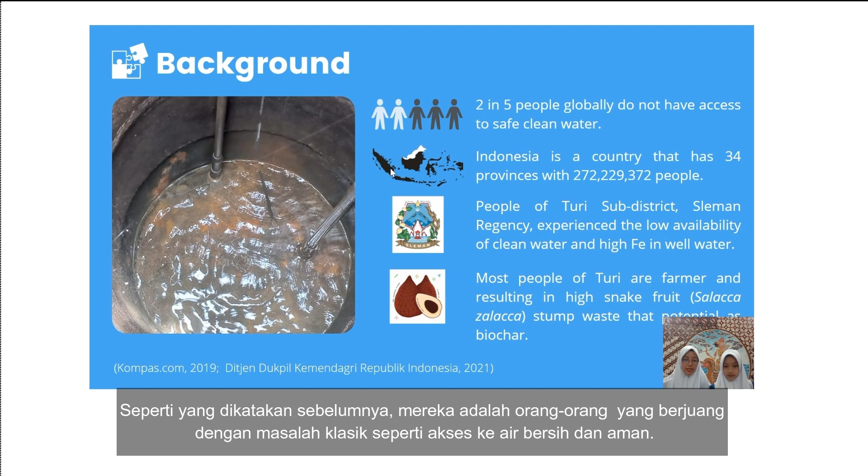As stated before, there are unlucky people in Indonesia who struggle with classic problems like access to safe and clean water. The rise of population leads to an increase in water demand. However, people in the Turi sub-district cannot all enjoy this luxurious clean water, specifically in Kenteng Wonokerto village. Most people there do not have access to PDAM for getting clean water, so they rely on the well's water. Ironically, this well's water is contaminated with iron, so further treatment is needed before consumption.

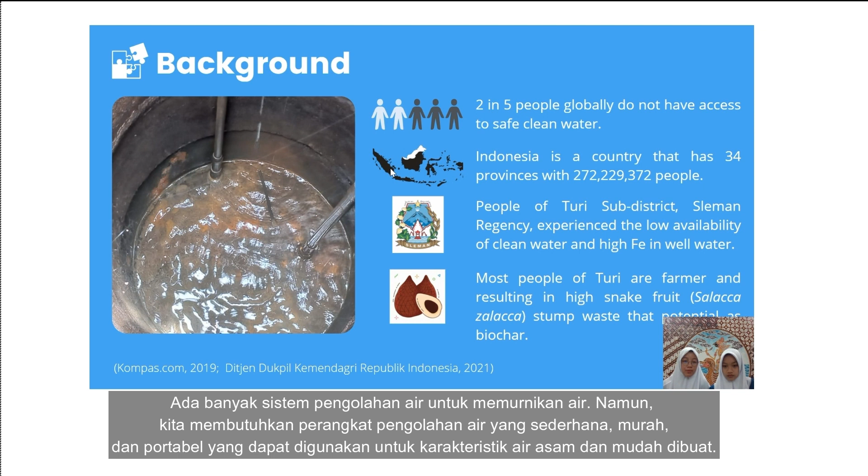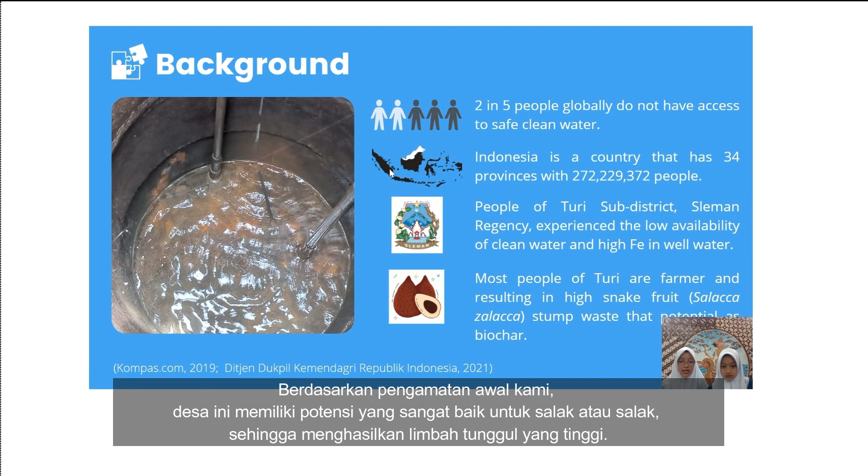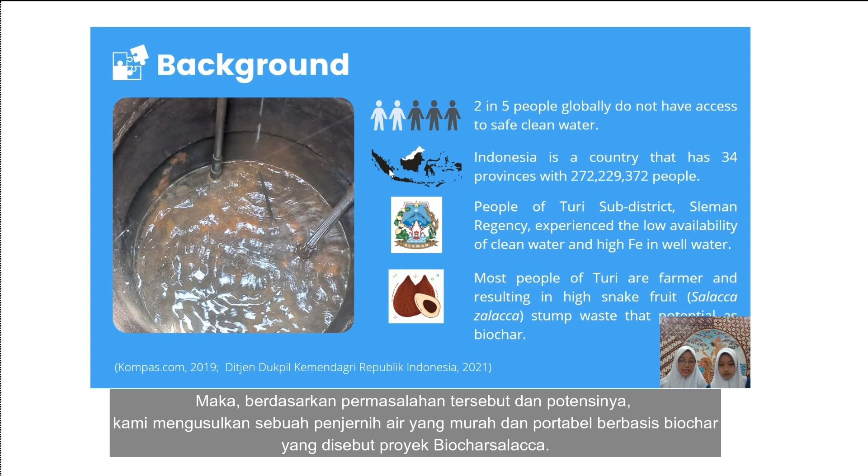There are a lot of water treatment systems for purified water. However, we need a simple, low-cost, and portable water treatment device that can be used for the characteristics of this water and is easy to build. Based on our preliminary observation, this village has excellent potential for snake fruit or salak, resulting in high stump waste. Meanwhile, this waste contains high carbon that can be transformed into biochar, and it can be used as water treatment material. So, based on this problem and its potential, we propose a low-cost and portable water purifier based on biochar called the Biocharsalacca project.

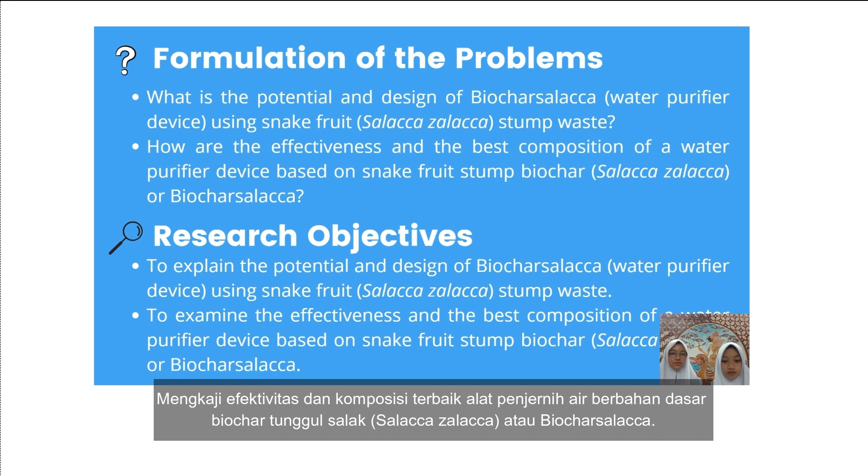With this background, we have two main research problems. First, what is the potential and design of the Biocharsalacca water purifier device using snake fruit stump waste? Second, how are the effectiveness and the best composition of a water purifier device based on snake fruit stump biochar, or Biocharsalacca? And our research objectives are to explain the potential and design of the Biocharsalacca water purifier device using snake fruit stump waste, and to examine the effectiveness and the best composition of a water purifier device based on snake fruit stump biochar, or Biocharsalacca.

This research was conducted in October 2021 to February 2022 at Kenteng Wonokerto Village, Turi Subdistrict, Sleman Regency, Daerah Istimewa Yogyakarta. This research used the quantitative approach with an experimental design, one group pre-test post-test design. Data was collected with observation, documentation, literature study, and experiment methods. Water quality data were analyzed in the iron or Fe parameter before and after treatment using Biocharsalacca.

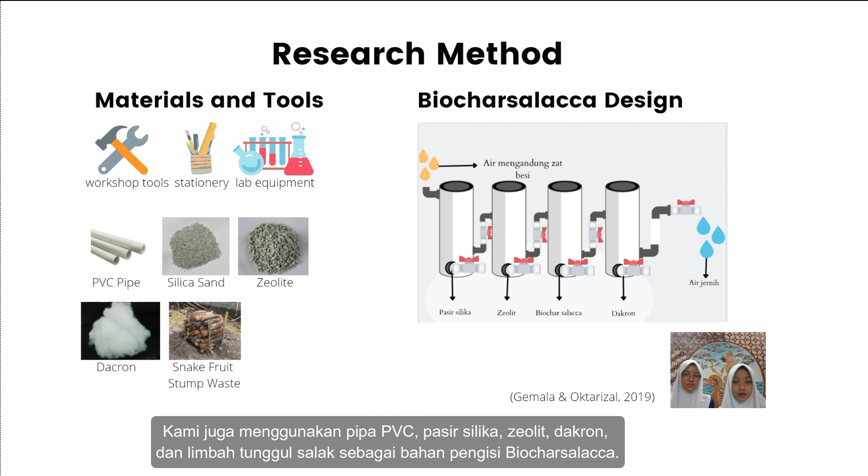This research used workshop tools, stationery and standard glass laboratory equipment. We also use PVC pipe, silica sand, zeolite, Dacron, and snake fruit stump waste as filler materials for Biocharsalacca. This is the Biocharsalacca design. Our research is divided into three phases. The first phase is biochar preparation and water sampling in people's wells. Next, we drafted and made Biocharsalacca filled with silica sand, zeolite, prepared biochar, and Dacron. Last, we tested the effectiveness of Biocharsalacca using water samples and analyzed its Fe concentration in BBTKLPP Yogyakarta.

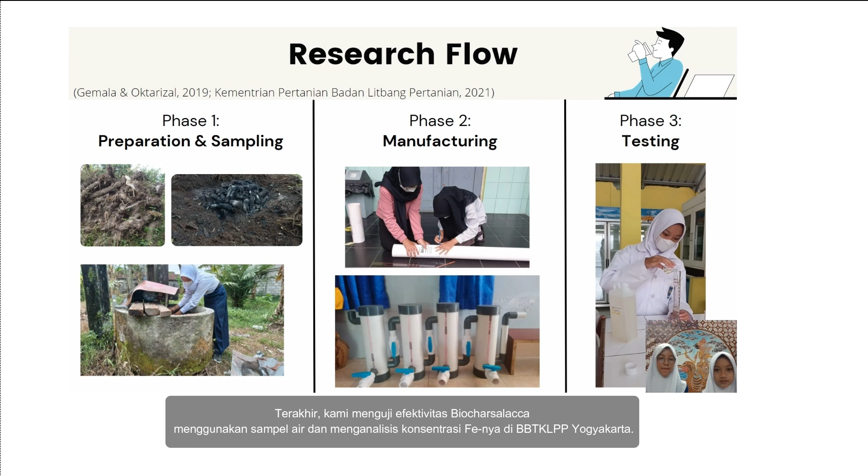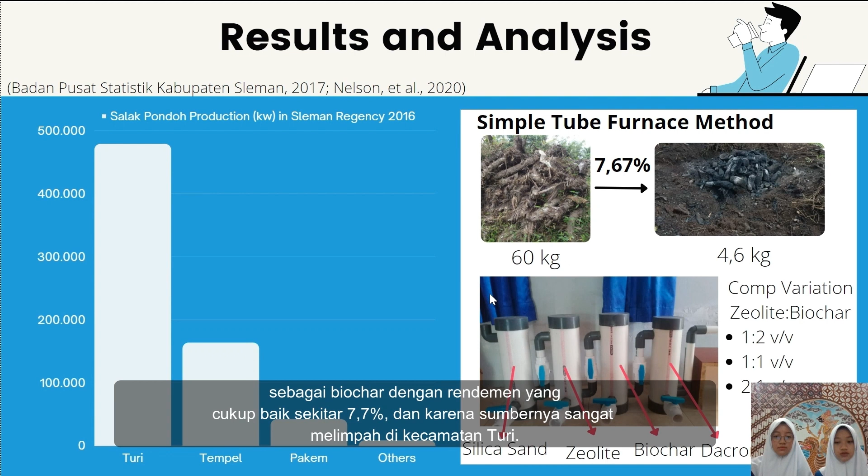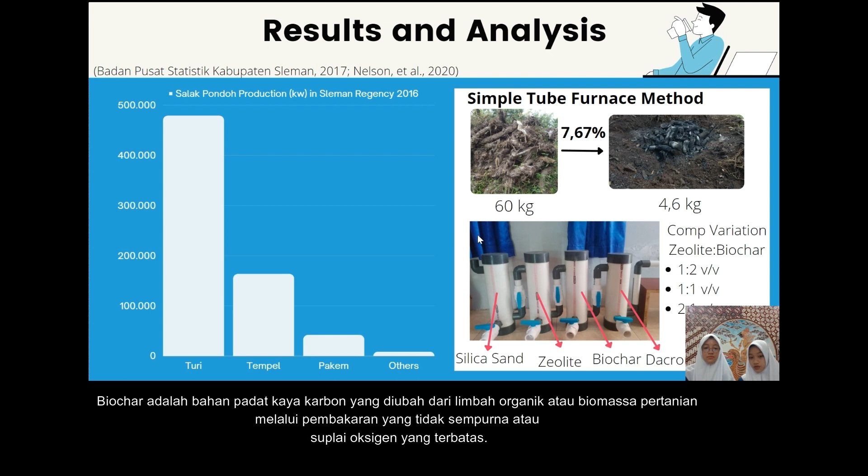We found that the snake fruit stump waste has excellent potential as biochar with a dry yield of around 7.7%, and because its source is highly abundant in the Turi sub-district. Moreover, this district produced over 450,000 quintals of snake fruit in 2016 and became the highest production in the Sleman Regency. Biochar is a carbon-rich solid material converted from organic waste or agricultural biomass through incomplete combustion or limited oxygen supply. In this research, biochar is made using a simple furnace method. The combustion process takes about 12 hours and is left for 7 days before being used.

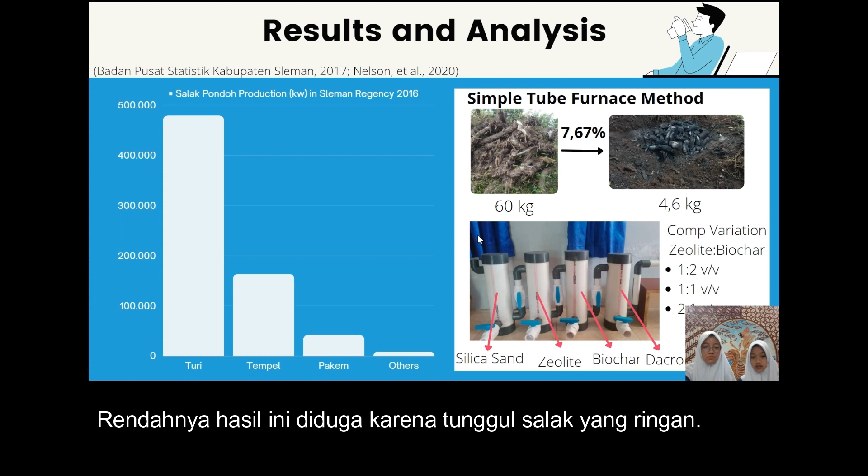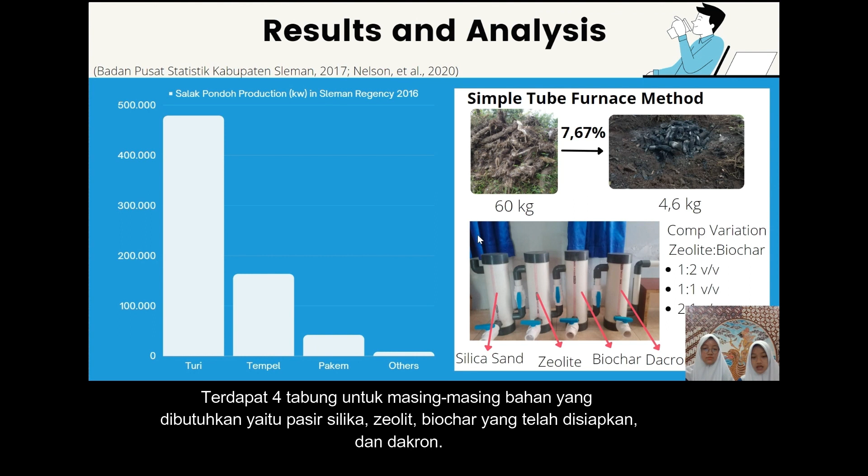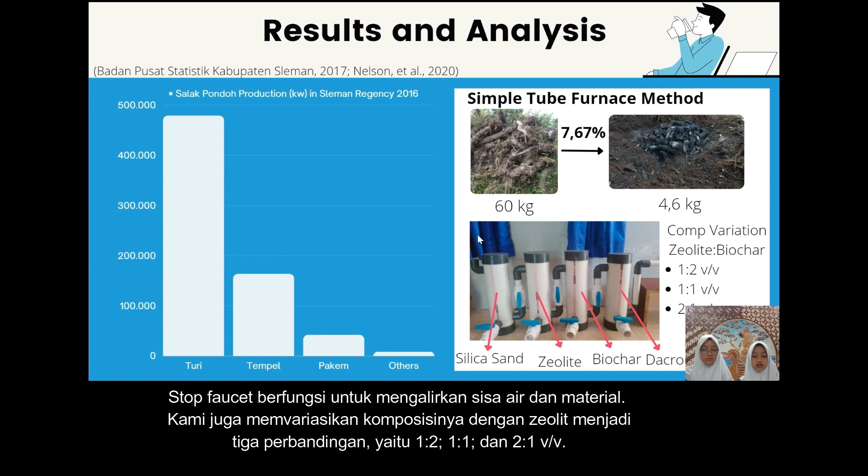From 60 kg of stem waste, 4.6 kg of biochar was obtained. This was predicted due to the snake fruit stem's light nature. If we were using the density of the snake fruit stem, then we expected a higher result. Next, we prepared biochar and other fillers and filled in the Biocharsalacca. There are 4 tubes for each required material, namely silica sand, zeolite, prepared biochar, and Dacron, and a stop faucet to drain the remaining water and materials. We also varied its composition with zeolite into 3 comparisons, namely 1:2, 1:1, and 2:1 v/v.

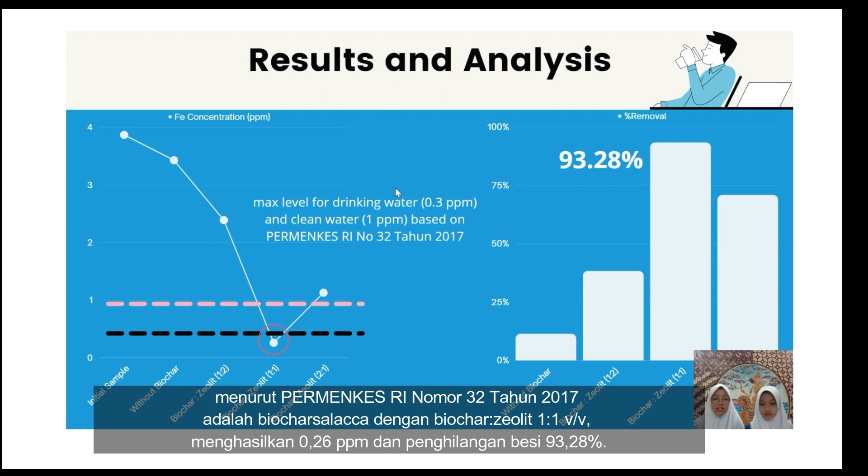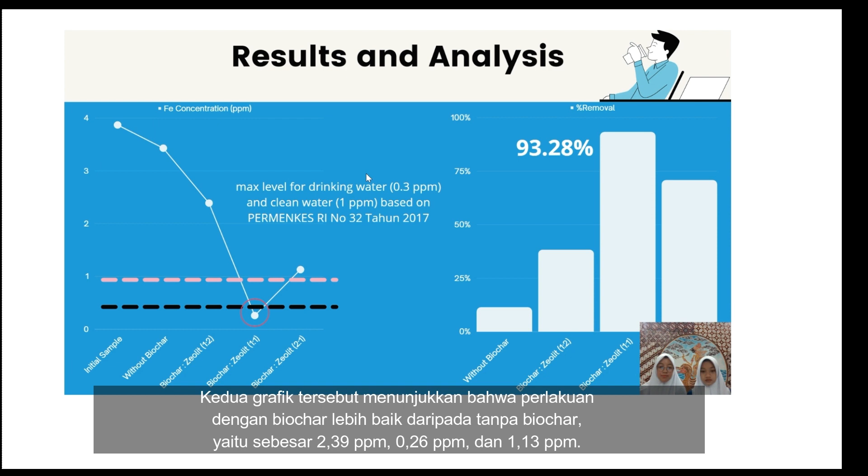We also found that the only composition that passed the drinking and clean water standard according to the Permenkes RI number 32 year 2017 is Biocharsalacca with biochar to zeolite 1:1 v/v, which resulted in 0.26 ppm and 93.28% removal of iron. This chart showed that the treatment with biochar is better than without biochar, resulting in 2.39 ppm, 0.26 ppm and 1.13 ppm. However, if biochar is added more, it results in a low effectiveness. This is predicted due to the low availability of zeolite, so biochar got heavy work to purify the water.

The mechanism of this Biocharsalacca is based on adsorption by zeolite and biochar and filtration by silica sand and Dacron. Water will enter through a pipe that rises to the top. Then the water will flow into the first tube containing silica sand. Silica sand will separate particles by their size. The acceptable size will pass through this tube and the bigger size will be trapped in this tube. When the water in the first tube is full, the water will flow into the second tube containing zeolite, then biochar, and lastly filtered by Dacron. Biocharsalacca also has a low-cost application because it uses materials that are easy to find in this location, is portable, lightweight, and sustainable because saturated biochar can be used as fertilizer for farmers.

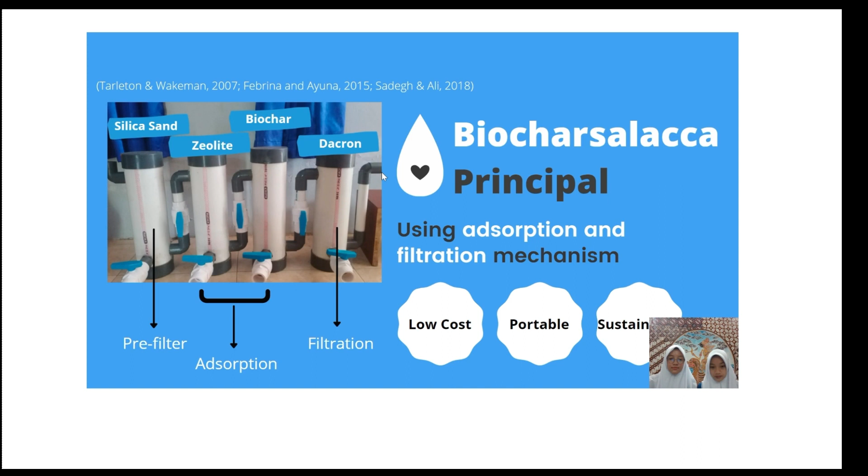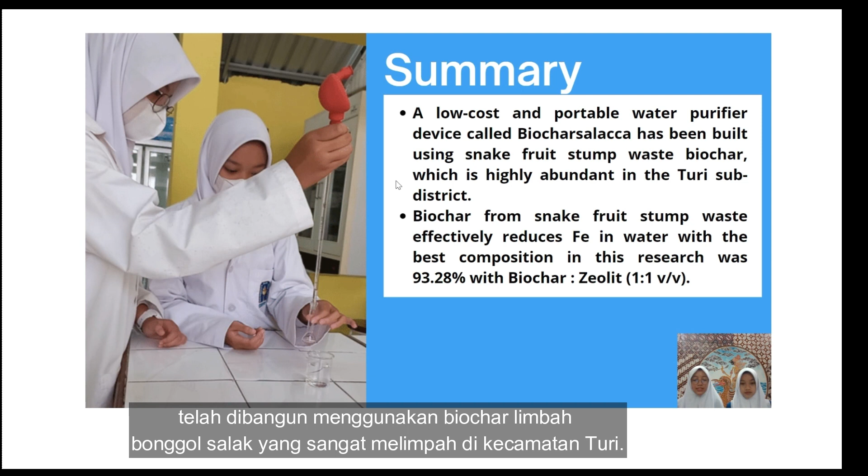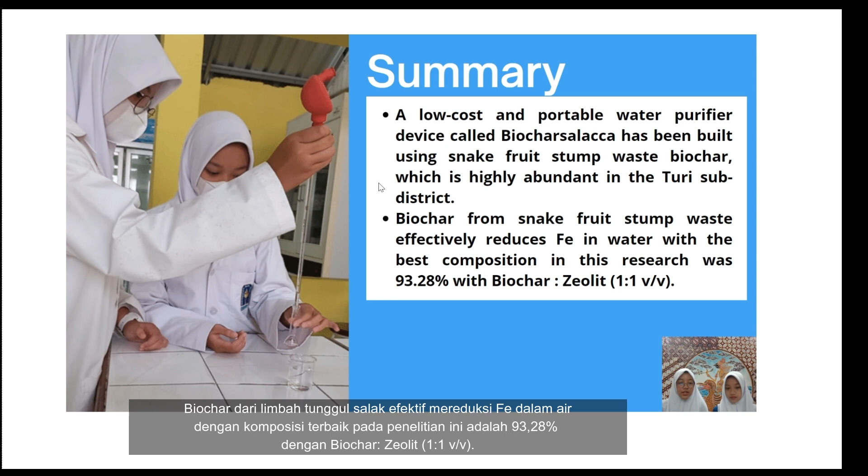Based on our research, we can conclude that a low-cost and portable water purifier device called Biocharsalacca has been built using snake fruit stem waste biochar, which is highly abundant in the Turi sub-district. Biochar from snake fruit stem waste effectively reduced Fe in water, with the best composition in this research being 93.28% with biochar to zeolite 1:1 v/v.

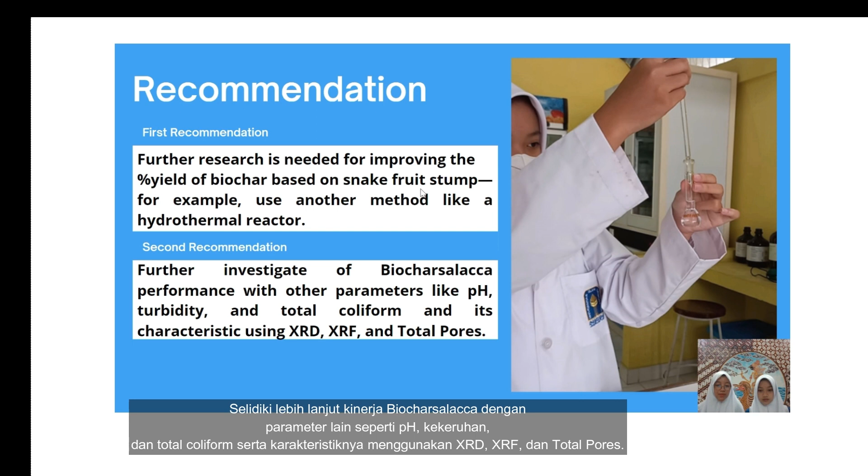And our recommendations for next research are: further research is needed to improve the percent yield of biochar based on snake fruit stump, for example using another method like a hydrothermal reactor. Further investigate Biocharsalacca performance with other parameters like pH, turbidity, and total coliform and its characteristics using XRD, XRF, and total pore. We live in a world where every single person should have access to clean and safe water.